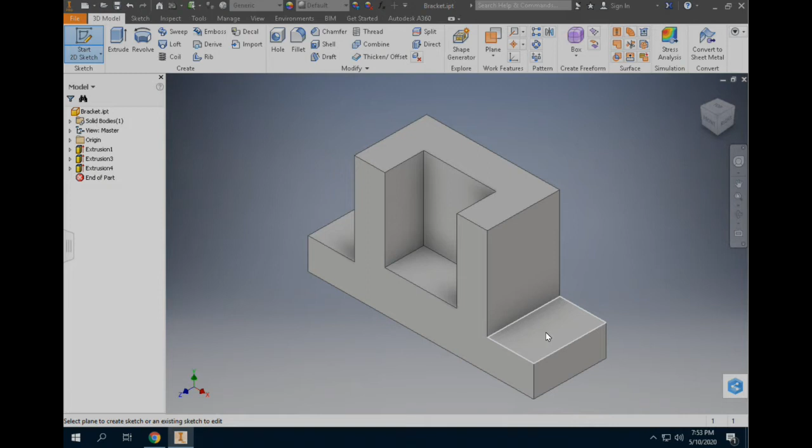I'm going to start with a 2D sketch right on this little flat top surface of our bracket. So I'm just going to single click there, and then hit project geometry, and I'm going to go ahead and project both sides of the lower portion of our bracket. So we should have two small yellow rectangles. Just single click in each of those, then hit the escape key.

To mark where our hole locations are going to be, we're going to use the point tool. I'm just going to click and put one point here, single click, one point there, and then hit the escape key, and then add some dimensions.

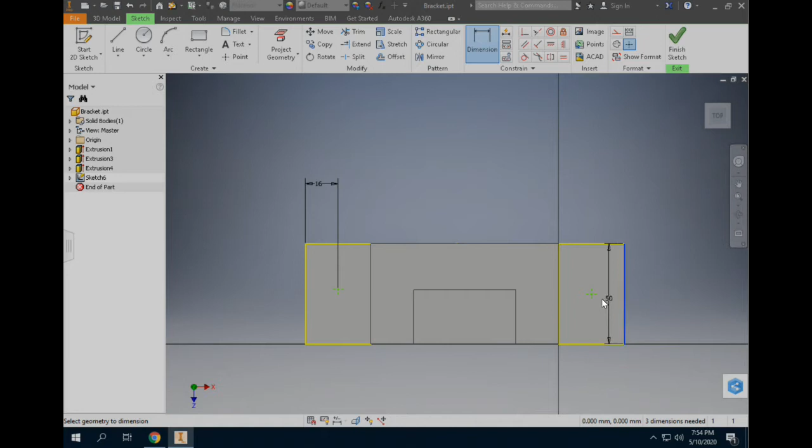First dimension is going to be from left to right, so I'm going to single click on the left edge of my bracket, single click right on that point, drag that dimension up, and that's going to be 16. Repeat that dimension on the other side, so I'm going to go to the right edge, single click, go to my center point, click, pull that one up. It's already 16, so that one's good to go.

Next thing I'm going to do is from top to bottom here, center this thing. So I'm going to click on the top edge, click on the point, drag that out, and that's going to be 23. Same thing on this side, click on the top edge, click on the point, drag that out, 23.

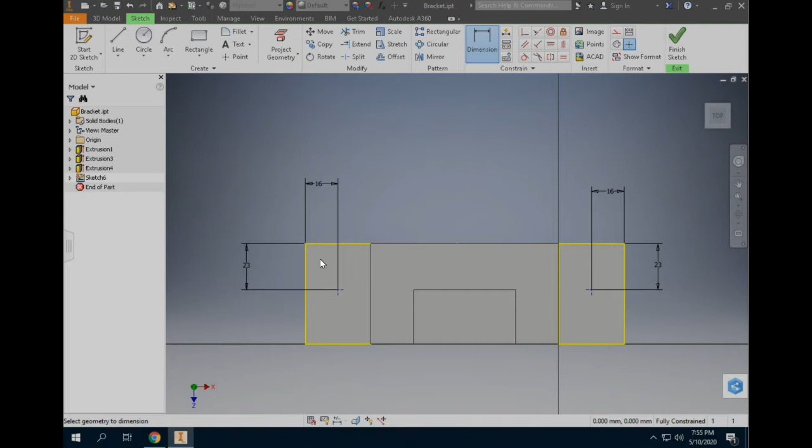And now we're going to hit Finish Sketch.

Next we're going to use the Hole Feature button. So I'm going to click that and drag this box out of the way a little bit. Now you can see it's giving me a preview of each of these holes. Right now they are quite small, so we're going to change this.

If you look along this list here, there are different types: there's a counter bore, spot face, countersink. We're going to choose a counter bore hole, and you can kind of see in the preview what that's going to show us. We have two different numbers here. The top number is going to be the larger number, that's the opening size, and for this, that's going to be 18.

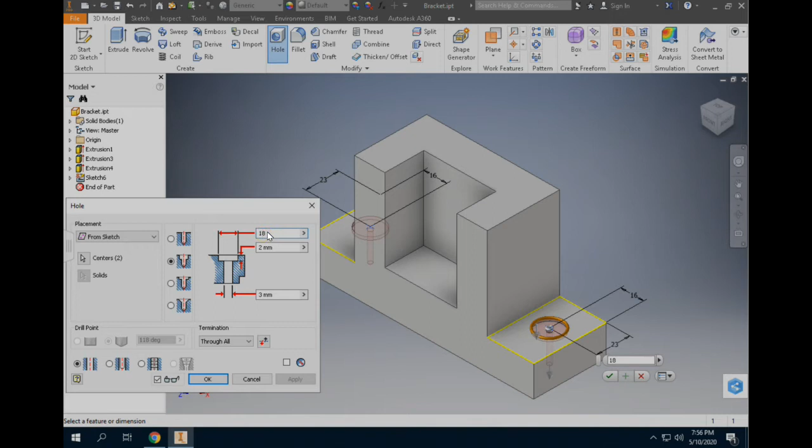The next number is the depth of our counter bore, the depth of our opening, so I'm going to change that from 2 to 10. And then the final number down here at the bottom is the diameter of our actual hole. I'm going to change that from 3 millimeters to 13 millimeters.

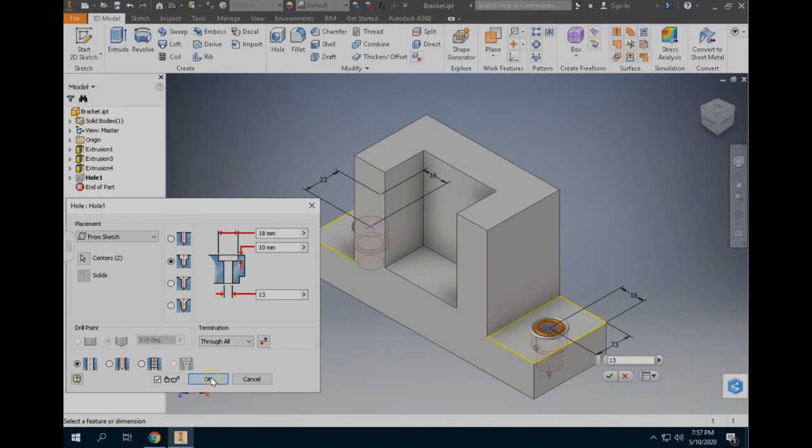That will update our preview. Termination through all, we want to leave that there, it's going to go all the way through the object. Click OK, and then we have our two counter bore holes.

So you can kind of see what those look like down in there. The purpose of a counter bore hole on something like this would be if you had a large bolt going into an object, it would let the bolt pass through and then let the head of the bolt, the thicker larger part, sink down into this bracket so it could be flush with the top surface, so it wouldn't be sticking out above it. That's how that would work in reality.

All right, so we're going to add a couple more holes. I'm going to choose the Start 2D Sketch button, click on the front, on the inside portion of this partial notch, and I'm going to choose Project Geometry. Click inside of there again, hit the Escape key.

And again, we're going to have two holes in here as well. So I'm going to choose the Point tool, click once here and another time just down below, just avoid that origin. We do not want to click on the origin or that center dot there, we want to avoid that. Hit the Escape key, and now we're going to add some dimensions.

First, I'm going to center them from left to right, so I'm going to go to the left edge, click, go to the center point, click, and drag that up. Third click, and that's going to be 23. Same thing on the bottom, click, click, that one also is going to be 23.

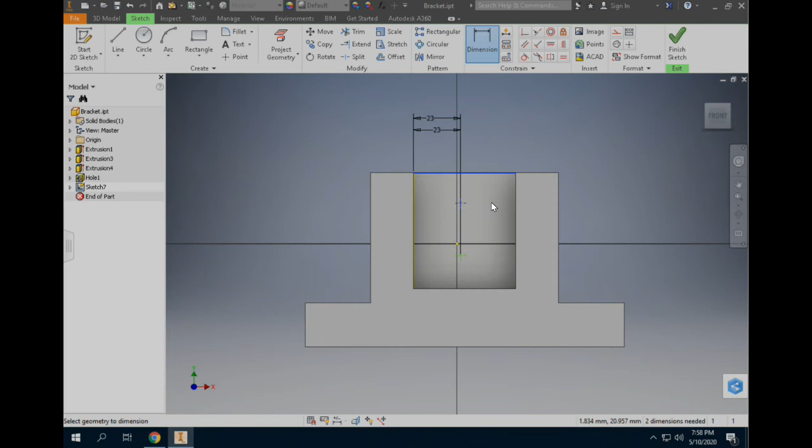Then to our top point, the distance that we want it to be from the top of our bracket is going to be 15, so I'm going to click on the top edge, then click right on that point. I'm going to drag that one all the way out to the side, click it in place, change it to 15. The bottom point, so I'm going to click on the top edge, click on the bottom point, drag that one out also. That one's going to be 42.

And then hit Finish Sketch.

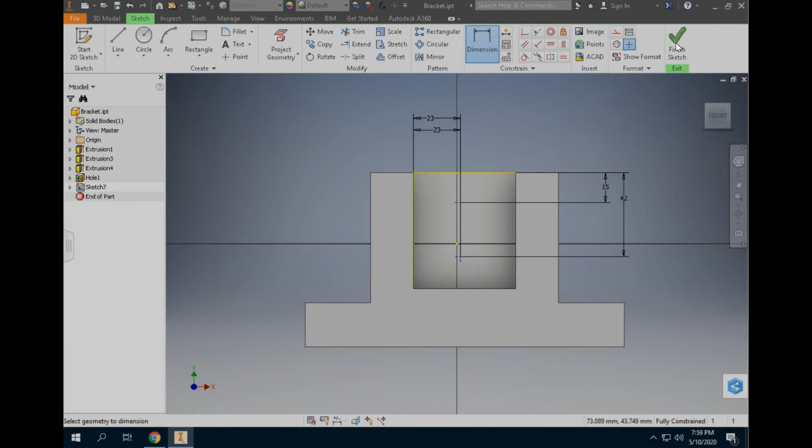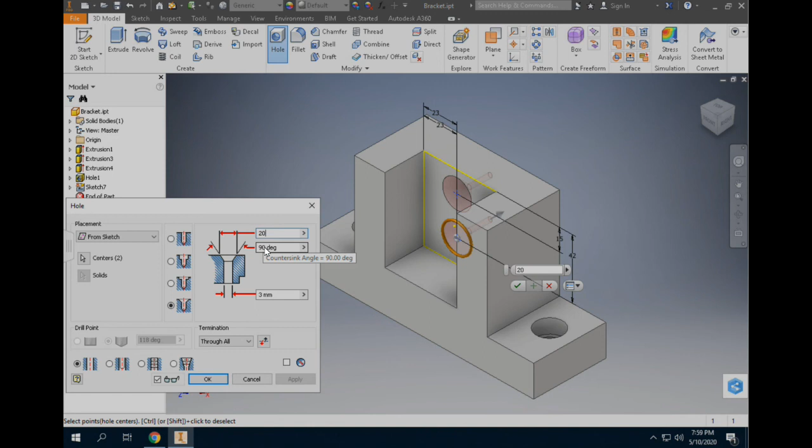And I'm going to use the hole feature again, and this time, instead of a counter bore hole, we're going to choose this bottom option, which is called a countersink. Similar idea, it does let the head of a screw or something like that get hidden or sunk down into the object, it just is tapered rather than being squared off like a counter bore hole. On this one, our top number, or opening dimension, is going to be 20. We're going to leave our countersink angle at 90 degrees just as it is, and then we are going to change the diameter of the hole to 13.

Termination, we're going to leave it through all. Click OK, and now we have our bracket with all of its holes in it.

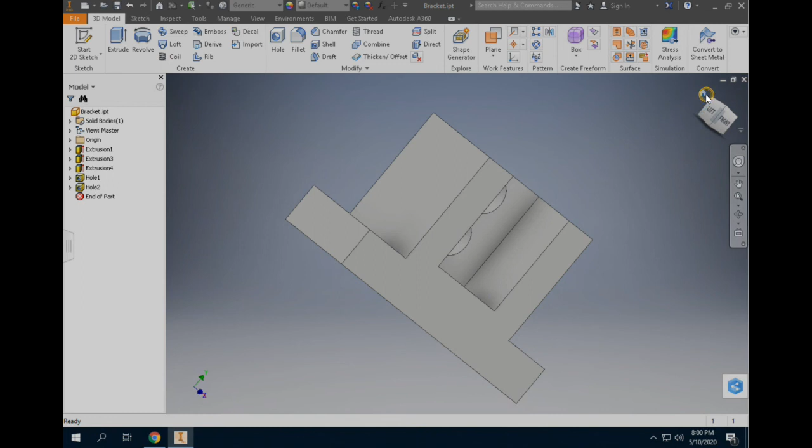And that concludes this step, so we can go ahead and hit the Save button or File Save.